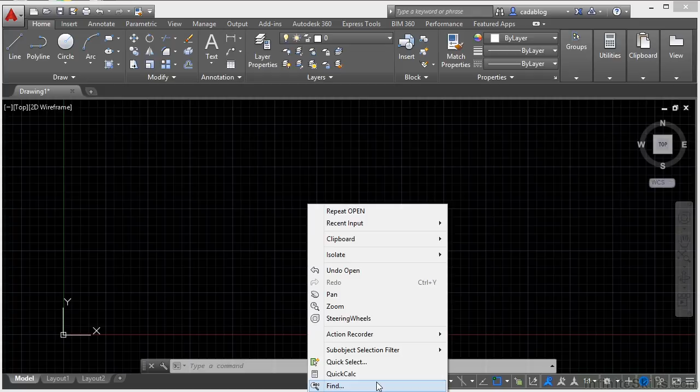Let's say I have an object selected and I right-click. This gives me a different shortcut menu, called the edit mode shortcut menu. It gives commands like move, copy, rotate, and others. I can erase it, move it, and get to a lot of different editing commands very quickly, without changing my ribbon tab or entering another command—I can get to all of it right here. I can select similar, deselect everything to change my selection, and do a lot of different things to it.

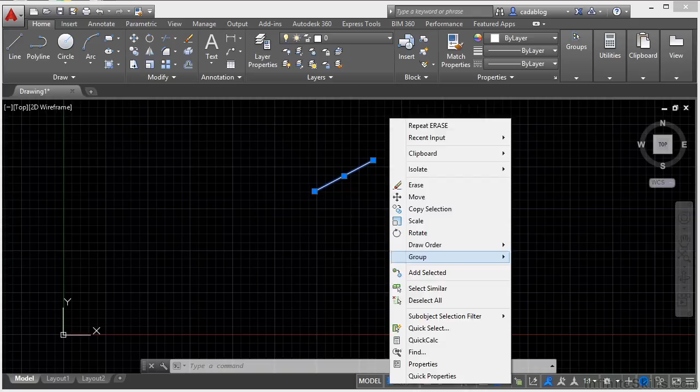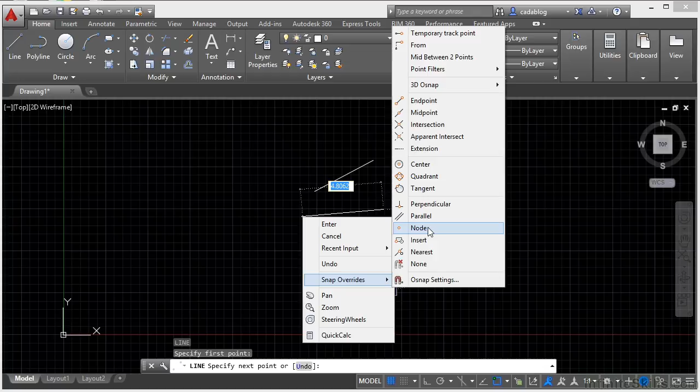So your shortcut menus are contextual, meaning different types pop up at different times. If I start a command, like the line command, and right-click, I get a smaller set of different commands here. I can pan or zoom, get around, undo, or get to my object snaps. We'll talk about object snaps later on, but they help me draw very specifically on my drawing—a very useful tool.

Typically, right-clicking will give you an appropriate shortcut menu for what you're currently doing. So as you work with AutoCAD and need to do something with your command, object, or whatever situation you're in, right-click—it could be a real time saver. It will also help you learn the abilities of the commands you're using. Everything in AutoCAD can be customized, even the right-click function. It used to be that right-click was nothing more than an enter command.

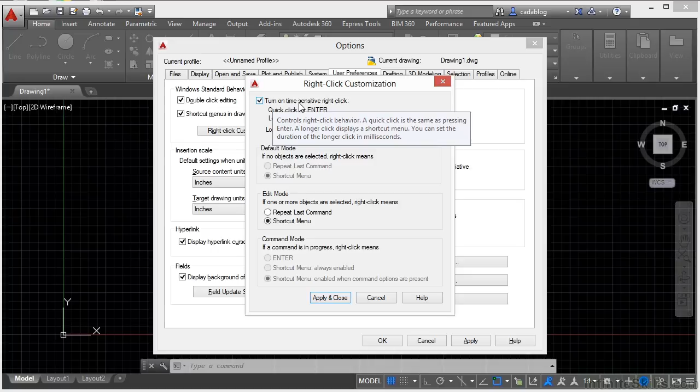Now you still have that option, but you can use either the enter or shortcut version of right-click. I've shown you how to do that in a previous section, but in case you skipped it, I'll show it here quickly. Go to your options by typing OP and pressing return, then go to the User Preferences tab. There are many tabs, but we want User Preferences. Go to right-click customization, and turn on the time-sensitive right-click by checking this box. Now, right-click and hold, wait a few milliseconds—250 to be exact—and the shortcut menus will pop up. Otherwise, a quick right-click just applies an enter key or spacebar, and they work the same way.

Another form of interface in AutoCAD is called the palettes. Many managers and tools are in the form of a palette. These palettes have tools, commands, or other information that allow you to manipulate your objects or add to your drawing. One palette I always use is the Property Manager palette.

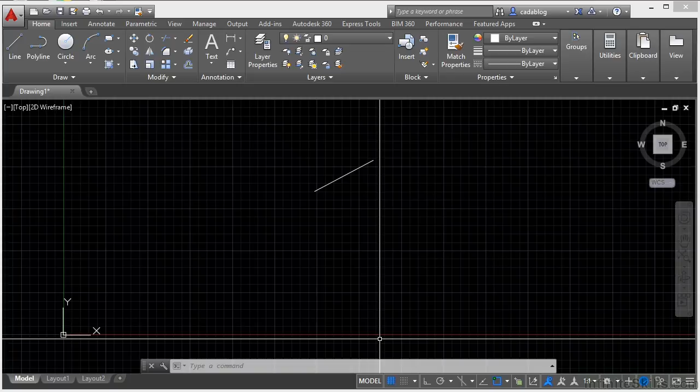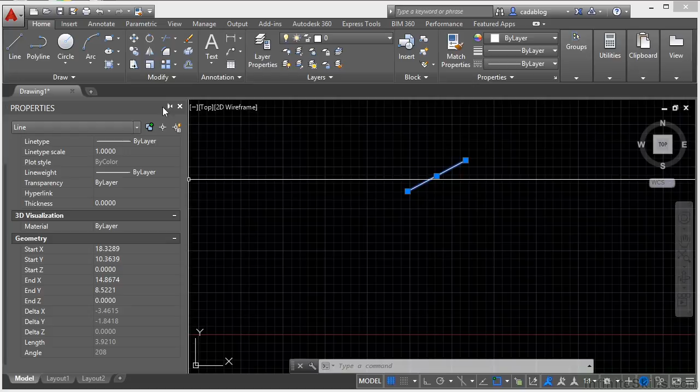To open it, press Control and the number 1 at the same time. This is your Properties palette, which shows you the properties of any selected object or objects. If I select this line, it tells me I've selected a line, along with general information like its color, layer, line type, and its geometry. I can scroll up and down by left-clicking on this scroll bar and moving it. If I want to close it, I click on the X up here, or press Control 1 again.

This is a great tool that you can use to alter objects with. I'll get into it in more detail later on.

Now Control 2 will bring up the Design Center palette. This palette is a tool where you can get items from other drawings and move them into your drawing. You can browse to a file, select the type of item you need, then select that item. You click and hold that item, whatever it might be, and then you just simply drag it into your file.

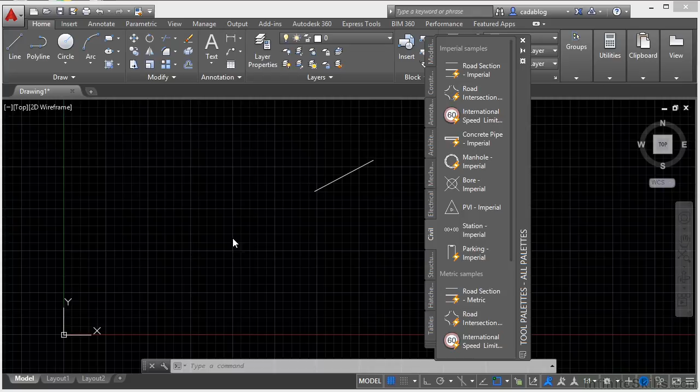Control 3 will open up your Tool Palettes palette. This palette is full of blocks, hatch patterns, materials, and other commands. I can click on these and get to other tools, other commands, some blocks and things. I can just click, drag, and drop, and now it's put into my drawing.

Pretty cool. Another useful palette is the calculator. If you press Control and 8 at the same time, that will bring it up. Now palettes are really cool because you can drag them all around on your screen. You can stretch them to make them a little bigger or smaller, whatever the case might be. This calculator is just that.

Now if I have it open and I've clicked on it, it's activated, I can just type in my commands as you would on a regular calculator and get your answers that way. So I can just type in my numbers like I normally would on my keyboard, or I can click on any of them here with your mouse and then just do your regular math.

Now this is really nice because you may need to use some of these numbers outside AutoCAD, to put them into a note or anything like that, because you can now highlight these with the left click and drag, and then right click and copy it out. And then you can just paste it into an email, into some notes, or to anywhere else that you might want to put it in.

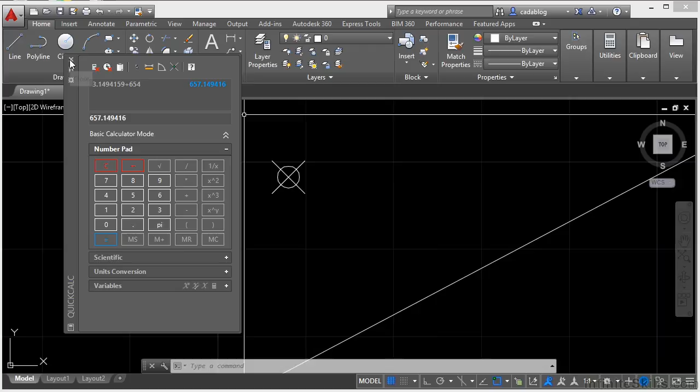Again, close this, just click on the X. Now it might not look like it, but the command line is also a palette. It's right here. I can click it, drag it, stretch it out so that it's bigger, move it all around. I can even close it if I want to. When you want it to come back up, you can just press Control and 9 at the same time, and it'll come back to the same way that you had it last.

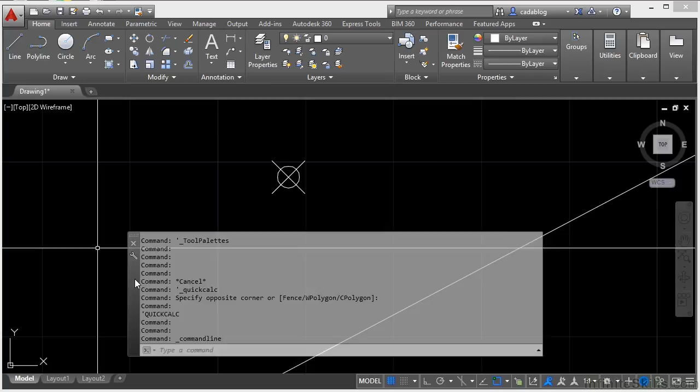Typically, all you really need is one line for your command line.

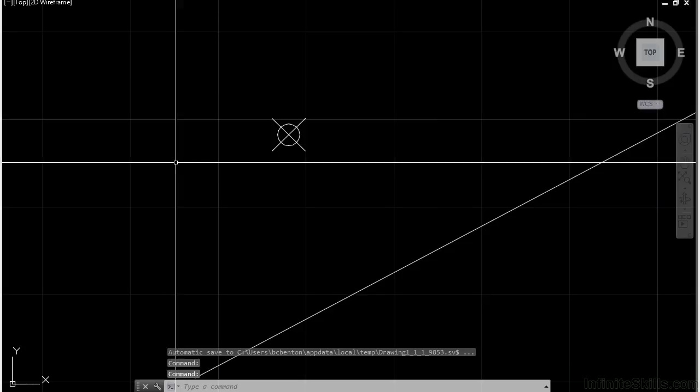Now, Control 0 is not a palette, but it's a drawing mode. It's called the clean screen mode. This mode gets rid of almost everything on your screen, giving you more screen real estate to draw with. So press Control and 0. And as you can see here, my drawing area is much bigger. So you can see here the Control 0, it just gets rid of most everything.

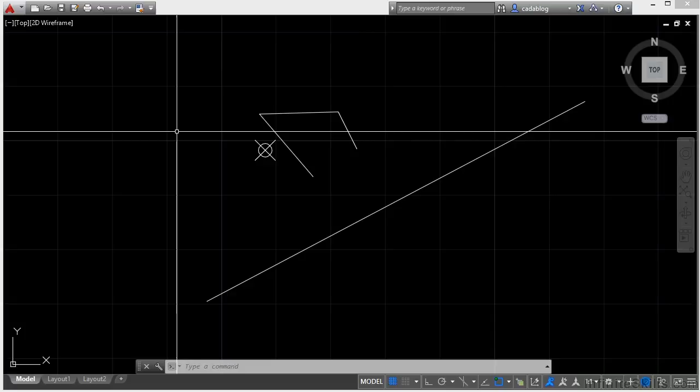Now you can continue to work as you normally would, zoom and pan with your mouse, type in your commands, all that you want to, whatever it is you need to do. Now your ribbon and all that stuff are just turned off. To get it all back, just press the Control 0 again, and that brings everything back to the way it was.

There are some other palettes available, but their complexity goes a little bit beyond the scope of this video, so I only wanted to touch on the main ones that you're more likely to use 90% of the time.

Palettes can be rearranged in your drawing area, though, as I kind of showed you earlier. They can be docked or locked into position, or they can just float around. They can hide themselves or they can stay open. You can right-click on them, and I don't know if you're getting a theme yet, but right-clicking in AutoCAD is a big deal. You can get to a lot of different things.

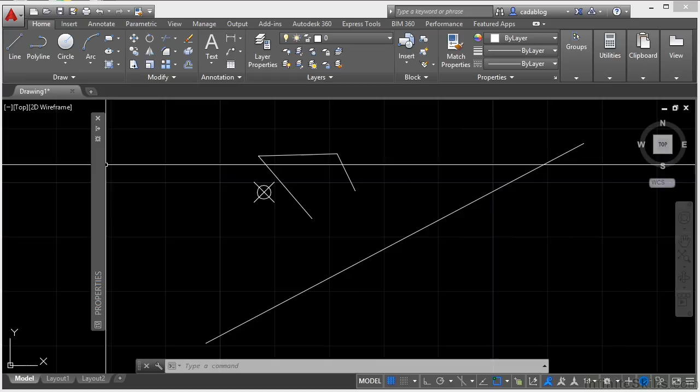So you can look at them, you can right-click on them. This will change some of your settings, like I said, to dock it or not. You can click on these buttons here to automatically hide it. You can left-click here, and you can change some of the transparency settings on it if you like. Normally, I just leave it.

But hiding them so that they automatically hide like this is a great way to save some screen space, so you always have access to it. You can still dock it if you want. Just right-click on it and allow for docking, and it can show up. You can click and drag and make them smaller. So there are a lot of different manipulations that you have available for you on Tool Palettes.